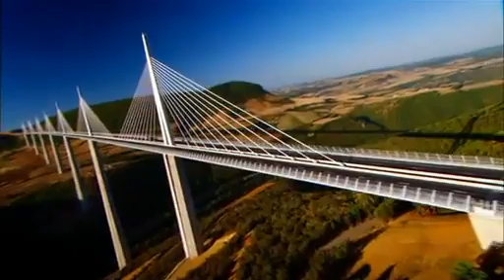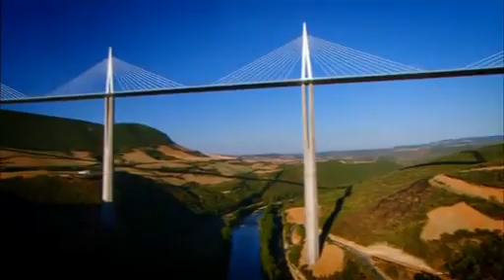Deep in the south of France, the stunning Millau Bridge is a record breaker. These tapering concrete giants are the tallest piers ever built. From the top, you would look down on the Eiffel Tower. Driving above the clouds, you cross the longest cable-stayed bridge deck on Earth, spanning the deepest canyon in Europe. Each year, this spectacular engineering achievement faces extremes of wind and heat in a valley no one thought could ever be conquered. But it wouldn't be standing here today without the power of lightning.

750,000 volts. What? A frying pan. Heat. A lost nuclear submarine. An accident in a silver mine. And a crafty trick of ancient Celtic boat builders. How did all those make that possible?

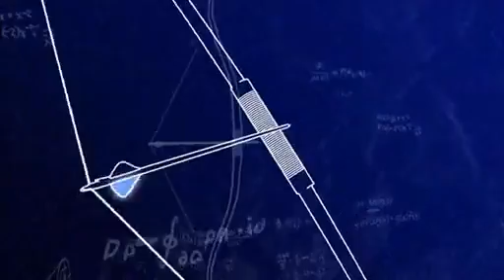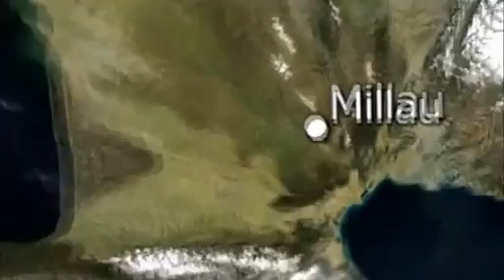This triumph of engineering and design lies in the Massif Central Mountains of southern France. It was built to lift a curse on the tiny town of Millau. For 30 years, the autoroute linking Paris to the beaches of the Mediterranean sped south through the French countryside, until it hit this, the Tarn Valley. A 2.5-kilometre wide, 250-metre deep gorge, or in technical terms, a very big gap.

To cross this gap, the tourist traffic was diverted off the 4-lane express route and funneled over Millau's tiny 2-lane medieval bridge. Summer in Millau was a nightmare. Gridlock traffic with 3-hour tailbacks and 18-mile queues. After 3 decades of mayhem, it was time to conquer the gorge.

And so in 2004, the world's tallest road bridge was born. A giant span, a quarter kilometre high.

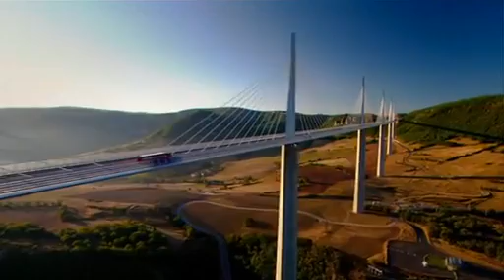The final lightweight steel design was the engineering equivalent of a curved ball, because the road is not straight. It arcs as it spans across the valley. The bend, designed to keep drivers alert, meant that for the engineers, it was not going to be simple to build. They needed a complex skeleton of over 2,000 individual parts. Cutting that much steel quickly and accurately would mean they'd have to master one of nature's greatest forces.

But first, to get the inside angle on the jigsaw of steel that makes up the deck, security have granted me special access. This, in case you hadn't guessed, is the tunnel inside the deck. So right now we're sandwiched between the road up above and then, well, nothing below. And from inside you can see just how clever it is.

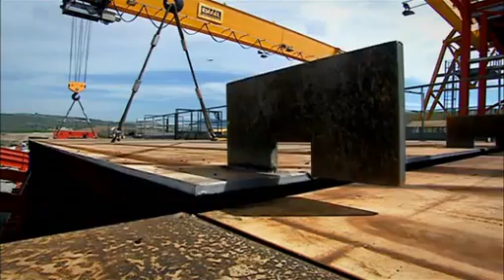It's hollow. They worked very hard to make it strong and light, and to do that they needed thousands of pieces of steel that had to fit together precisely in a massive jigsaw to make the curve of the deck. And each of those pieces of steel had to be made individually and in record time. And there's the challenge: how to cut 2,078 giant pieces of shaped steel with incredible precision, phenomenally fast.

The traditional way to cut steel is with one of these, an oxyacetylene torch. It works, but it's not fast and it's not easy.

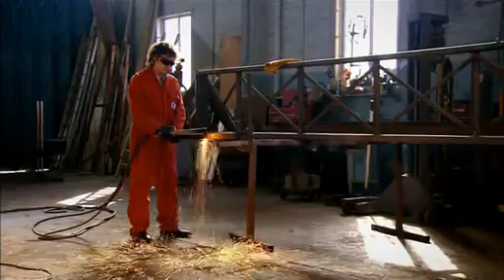Painstakingly slicing over 2,000 steel panels with oxyacetylene was a potential nightmare for the engineers, especially with a €25,000 penalty for every day's delay if they went seriously over schedule. So for the solution to their cutting challenge, they harnessed the power of lightning.

A bolt of lightning is an electric current that can generate up to 300,000 amps. That's enough to power 24,000 domestic kettles. More importantly, when a lightning bolt arcs through the atmosphere, it literally changes the world. It produces a new state of matter, and it's the key to cutting steel quickly. I'm about to see how.

First, I'm going to control lightning. This machine belongs to a special effects expert. He's going to help me become a human lightning rod and direct a scary amount of power. Mark Turner is my lightning wizard.

Wow, Mark, this is like walking onto the set of a 1950s B movie. Do you like it? It's brilliant, I think. What is it? It's a lightning machine. It's what we call a Tesla coil. Okay, it produces lightning. What I'd like you to do is put this on. Oh, I get dressed up? You do get dressed up. This is the fun bit. That looks like chainmail. It is chainmail. It's what we call a Faraday suit. It will protect you from the lightning. Okay, there's holes in it. What, boots off? Boots off, please. Check it off. Are you entirely sure about what we're doing here? What can possibly go wrong? Scarf off. It's my best scarf. Look after that, James. So, 1 foot in there. Nice, it's just the right size, isn't it? So the machine outputs about 750,000 volts.

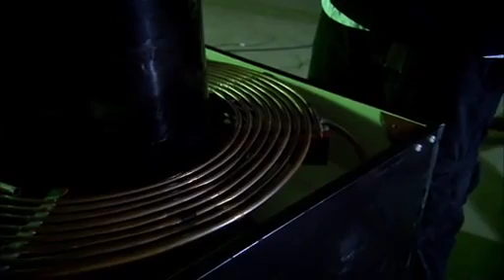Oh look, now I'm connected to the metal. The Tesla coil massively increases the mains voltage. When the energy level's high enough, current will flow to me, and I should be able to direct it with my finger. What about screaming and going like that very quickly?

So everybody with sensitive hearing ought to leave the room now. Anybody with implants in their ears or pacemakers or heart problems ought to leave now. And we're good to go. So, good to go, Richard? I feel lonely. Fantastic.

Mark takes a moment to build the voltage to lightning levels. You feel okay?

This machine was conceived by eccentric 19th century inventor Nikola Tesla. Labelled a mad scientist, well, he fell in love with a pigeon. He was also a pioneer of robotics, radio and electric power. In the course of looking for ways to transmit electricity across America, he devised this way of controlling lightning.

Like nature's lightning, my lightning wants to find the shortest way to Earth. It is the most extraordinary experience, like millions of ants crawling all over me.

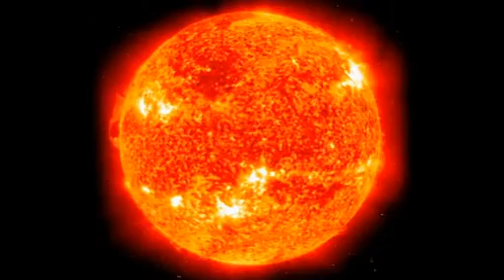Plasma is actually common throughout the universe. The sun and the stars are pure plasma. But it's very rare on Earth. This is a slow-motion shot of man-made plasma.

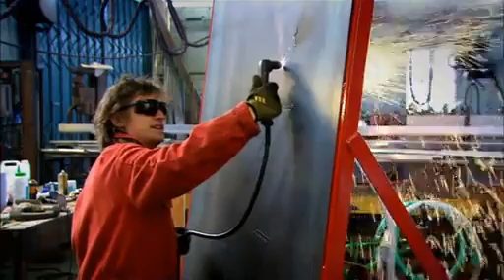When it's controlled and super focused, its heat can be used to cut metal. This is a plasma cutter. A stream of pressurized air comes out at the tip. That air is charged - that's what creates the plasma, and that's what melts through the steel.

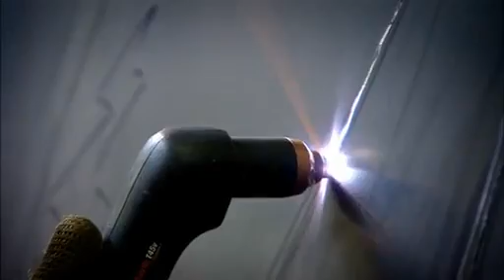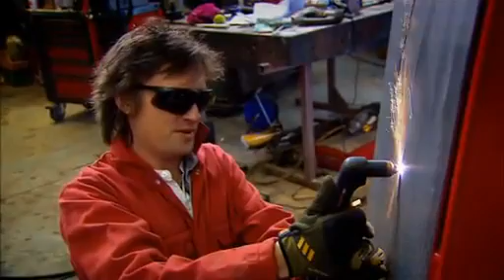Just as lightning charges air and turns it into plasma, the electric current in the cutter does the same. It charges the air, turns it into a jet of plasma, and that's what melts the metal very quickly. This is staggering, the speed. It's actually 3 times faster than an oxyacetylene cutter. But there's absolutely no sense of resistance - no effort to it from me. I'm just moving along the surface of the metal.

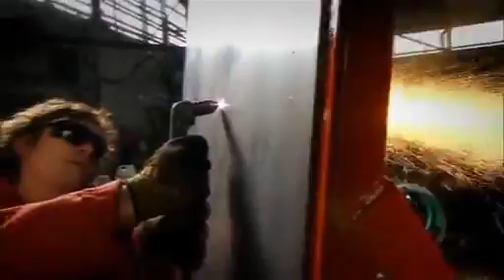Plasma cutting is brilliant for big metal construction because it's quicker than oxyacetylene. It also creates a much cleaner cut, so it needs less finishing, and that speeds production yet further.

Just air and electricity doing that. The power of lightning.

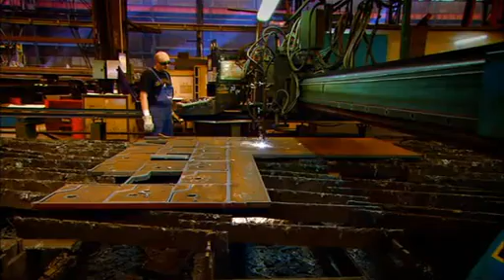Plasma cutting on a grand scale was the secret behind making the Millau Bridge road deck. Here at the Eiffel Metal Construction Company - yes, the same Eiffel that built the Paris Tower - the lightning heat of the plasma cutters sliced over 2,000 steel segments in just 2 years. So that's how the deck of the world's longest cable-stayed bridge was built, by controlling the power of lightning.

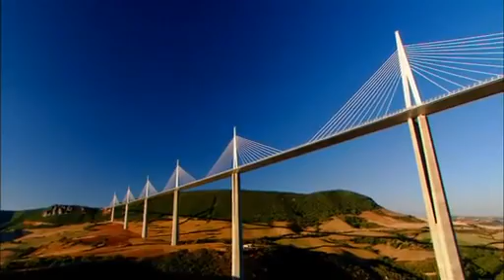But once they'd created the road deck, they faced another challenge: putting it in place without toppling the colossal towers built to hold it up. A lucky accident that reinvented the frying pan would solve this problem.

The Millau Bridge engineers had to somehow launch their steel road across the top of the giant concrete piers. But to achieve this, they had to devise a radical new delivery technique.

On your regular bridge, there are two main ways of getting the deck onto the piers. First you build your piers, which I'm doing here with bread. There we go, that's my piers. Then you can either build sections of your deck on site and crane them into position - there's my bridge complete. Or option two, you build the whole deck and push it out over the piers from the sides of the valley until it's in place. Perfect. But Millau is not your regular bridge.

Because of the depth of the valley they're trying to cross, the piers are not little squat ones like these - they're great big tall ones, 240 meters tall. Which means the expense, difficulty and complications of using cranes to lift the sections of road bridge up were immense. So you go for the second option - you build the deck, you push it out. But with piers this high, 240 meters, the sideways force of the deck would just topple them, and disaster.

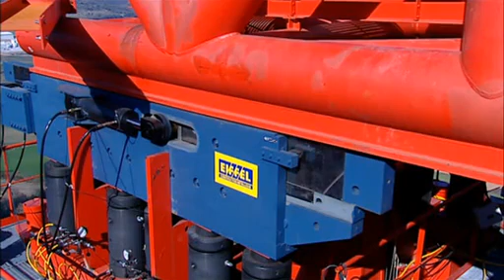This is the engineer's solution: a special hydraulic jack. It uses two giant wedges which slide across each other to lift and move the steel deck over the piers. Using wedges means the road deck is lifted and slid forward in one move, avoiding any pushing against the piers. Then, as the second wedge is pulled out, the deck is lowered to sit back down on top of the piers. Both wedges then reset to start the cycle again.

Each cycle lifts and moves thousands of tons of steel, a modest 60 centimeters. But over 15 months, the giant road deck was slid precisely and safely into place. It's incredibly simple, but very, very clever.

There's just one thing: 36,000 tons of decking are pressing down on top of these wedges. They have to be able to slide over one another to work. Well, to do that, the engineers had to rely on the most slippery substance ever created.

Back in 1938, chemist Roy Plunkett was working to improve the efficiency of fridges, but he ended up making an amazingly slippery powder. He'd made PTFE, polytetrafluoroethylene, known the world over by its famous brand name, Teflon.

New black, no-stain Teflon. Even hours after cooking, pans rinse clean in seconds. No soaking, no scouring. Teflon inside.

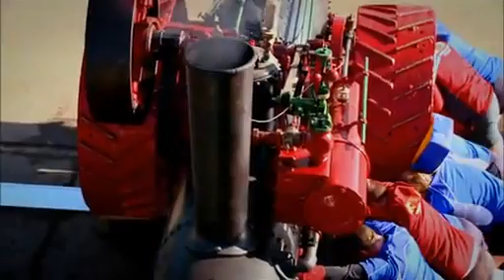Heave! It's going! There you go. Go on, hey! Keep going, keep going, keep going, keep going! It's going, it's going! Drive the legs, drive the legs. Oh, there we go, boy. There we go, there you go. Oh, well done, we did it. Lads, fantastic, you can take a breather.

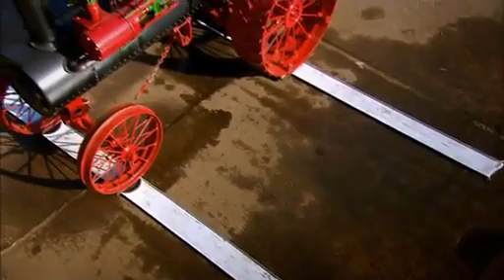Obviously, it was only really when Gary and I joined in that you'll have noticed it moved. So there we have it - over 9 tons of traction engine shifted. Standing on concrete, it should have taken 300 people. On Teflon, it took just 10. A pretty graphic illustration of just how effective PTFE is.

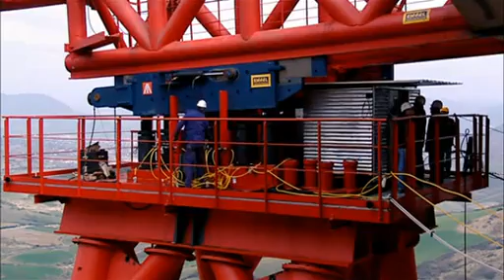Obviously not just at moving traction engines sideways with a rugby team - you can also use it to move bridges, and they did. Once the launch had begun, there was no going back. PTFE proved itself on the wedges, sliding the massive steel road deck over the valley - all thanks to the wonder non-stick stuff called Teflon, discovered by luck in a lab.

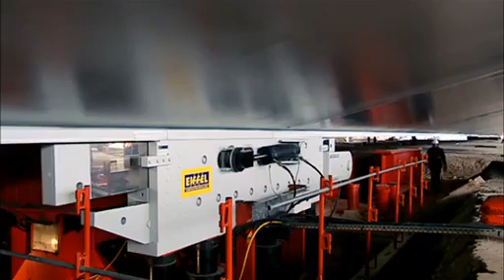Now the engineers had to face their next big problem: how to construct the tallest piers ever built, each to a specific point in the sky, with millimetre precision.

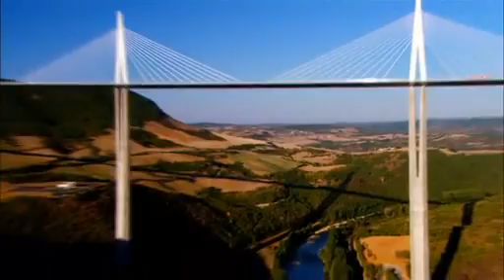The highest of these giants is 245 metres, as tall as a 70-storey skyscraper, and the other six aren't exactly short. They all had to end up in exactly the right place, within millimetres. They were only possible with technology from the submarine war games of the Cold War.

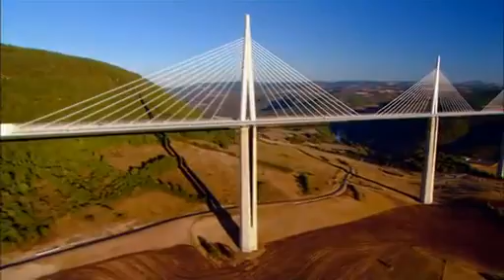Engineers analysed the stresses and strains on the bridge round the clock, 365 days a year.

This is the control room, where today cameras and sensors monitor the traffic, the wind, temperature and humidity. But back then, when the bridge was under construction, it was, if anything, under even closer scrutiny.

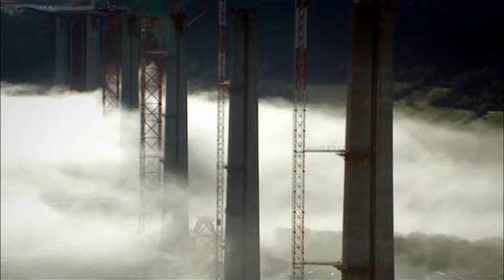Reflectors dotted about over the structure allowed the engineers to track the build and monitor the bridge's precise position. The engineers needed to build each towering pier up to a precise point in space, hundreds of metres above the ground, so it could meet the horizontal deck as it slid out, thousands of metres from the valley sides.

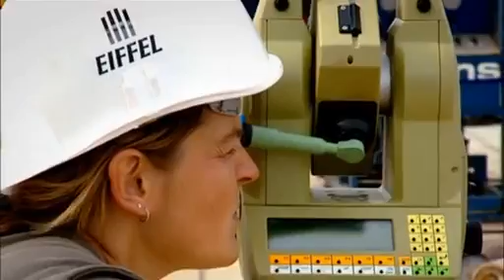A precise surveying network ensured that they got to exactly the right point in space, to within millimetres - impossible without a supremely accurate system of measurement. The kind you'd need to find a dot in the ocean. Cue our next connection.

It all started when US nuclear submarines began to get lost. The subs were designed to submerge for months, with gyroscopic systems to record every move. But over time, tiny errors mounted up. When the subs surfaced out in the middle of the ocean, they couldn't work out where they were. A precision nuclear weapon is not much use if you don't know which way to point it.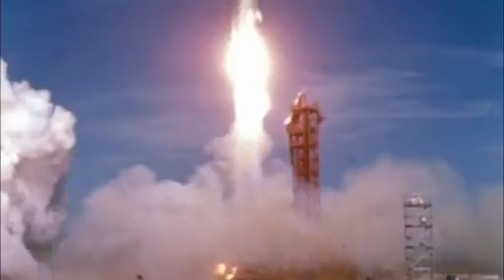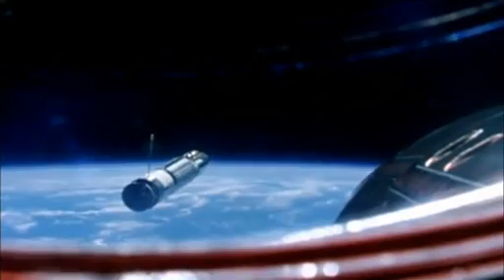The US Navy's solution was to launch satellites. On surfacing, the subs would listen for the satellite signal to work out where they were. It was the very first use of satellites for global navigation - the foundation of today's global positioning system, or GPS, as we all know it.

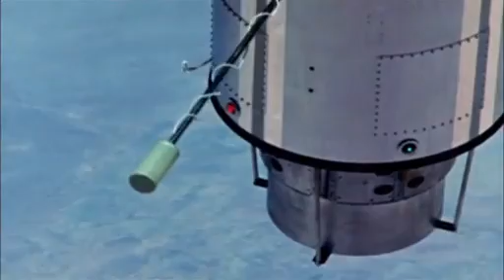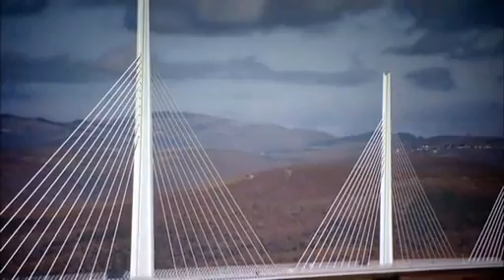But how does it actually work? And how could a signal beamed from 20,000 kilometres away help engineers build a bridge to millimetre accuracy? The trick is to calculate how long a signal takes to get to Earth. If you know its speed and when a signal was sent, you can work out distance very accurately.

To see just how this works, I'm meeting John Shelton, an expert in the field of acoustics. In a field. Hi, John. Hi, Richard. Well, I'm here, and frankly, I'm confused.

So, first of all, how can you measure these distances? What are we going to do? Well, you know how GPS works. You've got satellites up in the sky beaming signals down to us. Depending on where we are on the surface of the Earth, by measuring the delay between those signals from the different satellites, we can find out exactly where we are, because we know where the satellites are and we can measure the delay. Yes, I can get that. That's right. The only problem is we haven't got any pet satellites.

So instead of using radio signals, we're going to be using acoustic waves. Noise. Exactly. How? So what we need is a nice noise source. I've got my car, I can start it up, it makes quite a racket. Big V8. No, I think we can do better than that.

All right, it's this. I did wonder. It's in here, it's in here. Let's see, can I help? That's louder than my car. It's quite handy, isn't it? Good enough? Yeah, we've got the gizmo over here, and we're going to take this with us, and we're going to be making the noise as we go down and measuring the delay as we go. You coming with us, Chris?

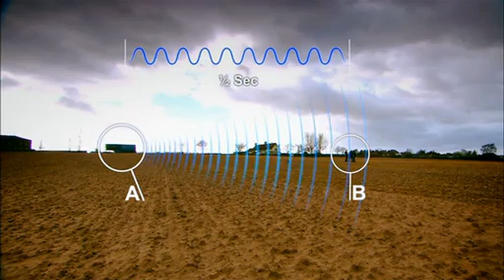John's computer measures the time it takes the guitar notes to get from the truck at A to us at B. From this, knowing the speed of sound, we can work out how far we are from the start. So a half-second delay would mean that we're 170 meters from the speaker stack, our own version of a GPS satellite.

This is quite weird. Will that do you? 170. There you go, thank you very much.

So although what we've been doing was a bit, frankly, odd if you were watching from over there, we were using a signal to measure distance. And it doesn't matter what the signal is, we use noise, it could be anything. If you know how fast the signal is travelling, and you know how long it's taken to get from one point to another, then you can use that information to work out how far apart those two points are. You don't need a guitarist.

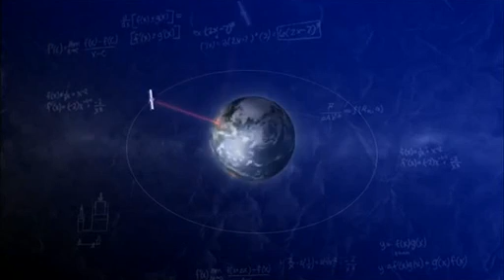The satellite signal the nuclear subs listen for contained data on the time it was sent and where it was sent from. The more satellites you have, the more precisely you can fix your position. Measuring the delay from the time a signal was sent to the time it's received, you can work out how far you are from a satellite, just like we calculated our distance from the guitar amplifiers. Today, there are 24 global positioning satellites orbiting the planet, sending signals back to Earth.

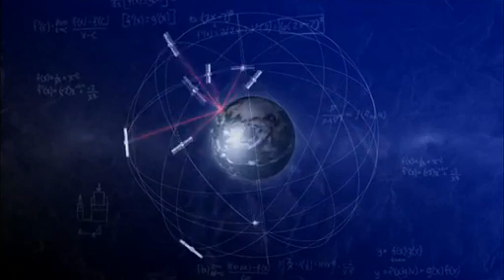Now, GPS receivers use exactly the same principle, only with greater accuracy. They compare the distance from four or more satellites to determine their position. Your GPS receiver can work out where it is to within 10 meters. That's fine for directing your car, but completely useless in building a bridge where an error of 10 centimeters would be a disaster. The Millau engineers fixed GPS receivers to the deck and piers to keep construction on track. Their system was way more accurate than car sat-nav, but it still wasn't enough.

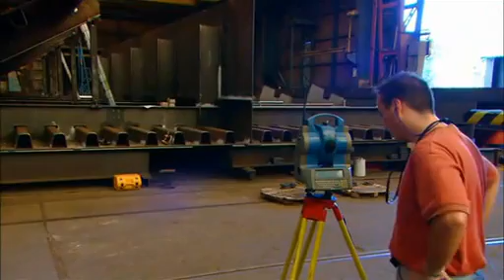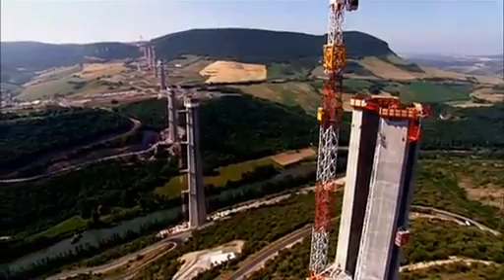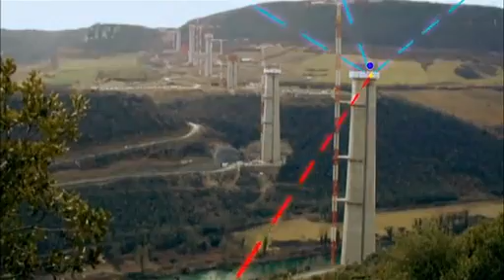Tiny temperature fluctuations and building stresses could send the piers and deck off course, and although successfully guided by the satellite data, they needed to double-check their GPS positions against a rock-solid reference point, so they anchored one to the ground. The engineers took GPS guidance a step further. They bolted a receiver to a fixed point on the side of the valley, and it provided a reference signal for all the other receivers on the piers. Because it's anchored, it reduced the error of the GPS signal down from meters to millimeters. The network of monitors on the bridge constantly checked the accuracy of their position data against these known points. And all the time, the towers climbed skywards.

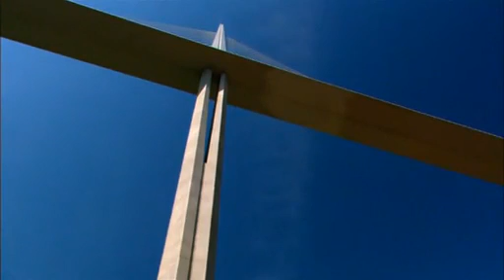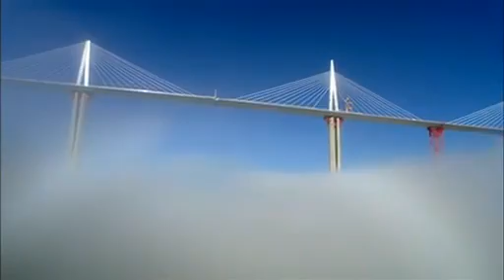So that's how technology for locating lost subs positioned with pinpoint precision the world's tallest piers. But Millau's steel roadway, weighing five times more than the metal used to build the Eiffel Tower, needed support from above as well as below.

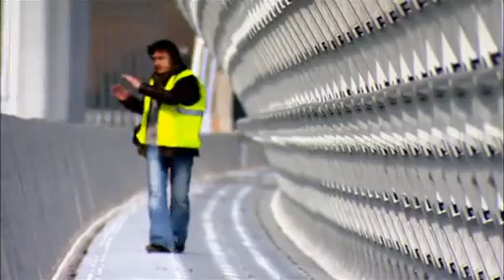And that's where cables come in. When the deck was being pushed out over the top of the piers, the engineers used a web of cables to support the end of it, and they held it in place even when the winds blasted up the valley.

So how did 36,000 tons of steel road stay put in a valley notorious for storm-force winds? The answer lies with a series of accidents in a German silver mine.

In winter and early spring, Europe's weather can turn on its head. Low pressure over the Mediterranean sucks cold air from the north down through the south of France. The Tarn Valley is pretty much your perfect wind tunnel, channeling mountain storms along its length. Winds here can reach 130 kilometers an hour.

That's a pretty severe test for the cables here on the Millau Bridge. They take the strain, but it's only because of a series of mining accidents that they exist at all.

Throughout history, miners have hauled heavier and heavier loads up from below ground. But this put dangerous stresses on the traditional pulleys and ropes used.

Man has made rope since the earliest times, and depending upon where you lived, you could choose from a range of different plants to make it. In Asia, a relative of the banana plant was used to make manila. And across much of Europe, cannabis, of which this is a relative, was used to make hemp, among other things. Rope is usually made by twisting fibres together.

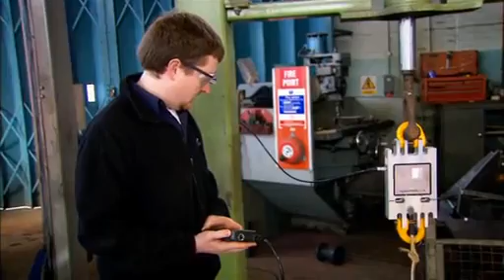And here we go, with the load increasing. We've just hit 100 kilograms, 200. And we're now on 260 kilograms. And now we're just hitting 300 kilograms. And it is stretching. Oh, there you go, look.

And there we go. The rope doesn't break suddenly, but gradually different strands of the rope start to break individually. It's still supporting some load until eventually the final strand will break. And that's your lot. Got to 640 kilograms. That's nearly two thirds of a ton.

So the way it breaks is useful. That's right. The weight at which it breaks is not so good. The rope breaks gradually — single strands break, but the rest of the rope still holds some of the load. So it doesn't just give up. So we need now to test something. Exactly.

To earn more, the miners needed to haul bigger loads, so they were looking for something stronger than rope. Which is why alternatives like metal chains came about. Trouble is, compared to rope, metal chain has a nasty way of breaking.

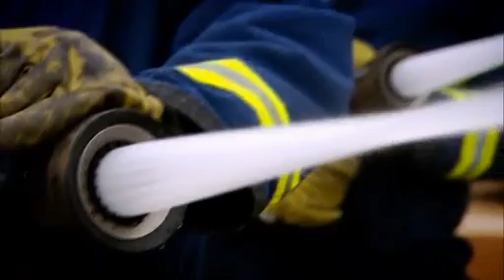So now we're hanging a large car from it. The chain is rated at 2.5 tons, but we've already hit over 3.5 tons, and it's still holding. Now we're running out of water — we've probably got about a minute's supply. What you're telling me is our chain is too strong? Yeah, yeah. OK, thank you.

Oh, there you go. Or maybe not. 3,790.

Just like in the mines, the chain takes a much greater load than rope, but it breaks catastrophically and without any warning. Oh, that's perfect - that's exactly where the two links cross over, yes, shearing, where it's bending round.

So how quickly were you recording this? We're recording at 2,000 frames per second. So that broke in less than 5 milliseconds? Yes. So you'd have no warning at all? Instant. Ah, you have the culprit.

We found the link here in the water, and you can see where it's failed. The significance is where it's gone is a weak point inherent to the chain, inherent to its design - the material here sees a shear stress that causes it to fail. This shear strain, this bending, is a weakness every chain will have at that point.

And that's what cost lives down the mines. Exactly, yes - a failure that catastrophic and that quick. What can you do? And that's where a great invention from a German silver mine comes in.

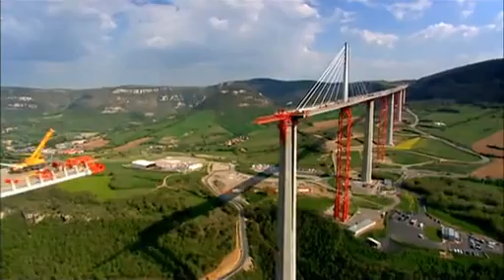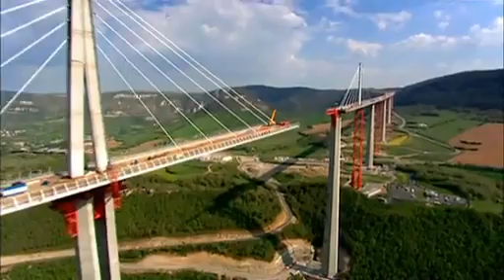Back at Millau, the engineers were utterly confident in the strength of their metal ropes. At one point during construction, almost 170 metres of deck hung over the valley from just 6 cables. The completed bridge is designed to carry 35,000 tons - equivalent to pickup trucks crammed nose to tail in all lanes, piled 10 high.

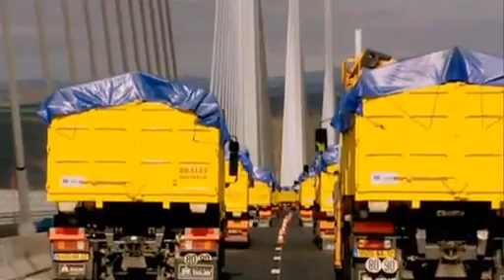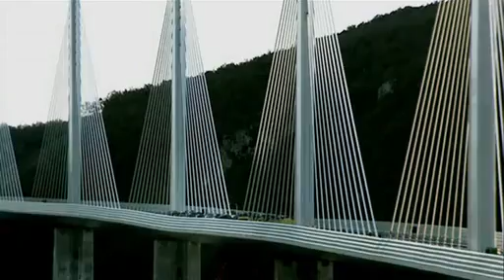To prove the cable's strength, engineers organised a showy demonstration. 28 trucks with a combined weight of over 900 tons drove to the midpoint. The cables barely gave - the span bent a mere 26 centimetres. A triumph then for Wilhelm Albert's metal rope idea.

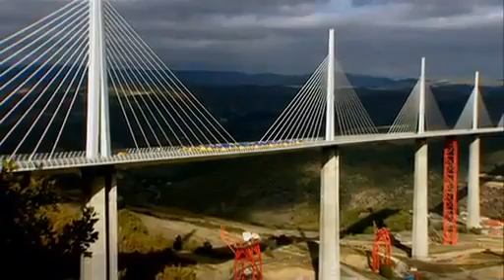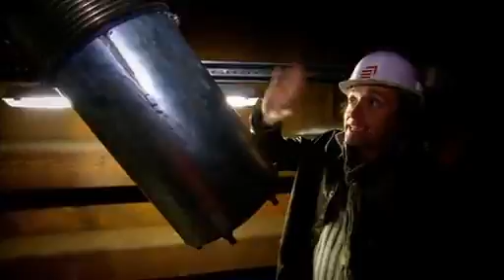But there's a neat twist here at Millau. This bridge is designed to last 120 years, but inevitably a century-old cable isn't as strong as a new one. If the bridge is held up by cables, how do you take them down to replace them without the bridge falling down? The answer lies in the construction of the cables themselves - from above they look like a single solid piece, but each one is a bundle of as many as 91 smaller cables. Those smaller cables are each made up of 7 individual strands, and their job is crucial, because each one can be taken down and replaced if it corrodes without having to take down the entire bundle.

Prompted by accidents in German silver mines over 180 years ago, the inspired idea to make rope from metal strands has made the magnificent Millau Bridge possible. But the bridge would still collapse in the scorching summer heat without an engineering solution borrowed from the ancient Celtic boat builders.

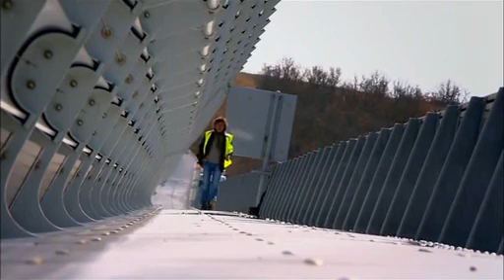Building with metal comes with one massive drawback: the hotter it gets, the more it expands. Let me show you a little example of metal expansion. This is a heavy-duty jar, pretty tough to break, and this is a metal core. Putting the jar around the core, I shall now apply heat - you probably guess what's going to happen if I heat up the metal core and expand the metal.

Add heat to metal and it expands. This becomes a problem when the metal is up against a material that's much less flexible, in this case glass. While we're waiting for something to happen, it's worth thinking where else we might find large amounts of metal interacting with a material that doesn't like to bend.

The tiny expansion in this demonstration scales up the more metal involved. Rail track can dramatically expand in extreme heat, and with nowhere to go, it inconveniently buckles. If this were to happen on a bridge, it could be a disaster.

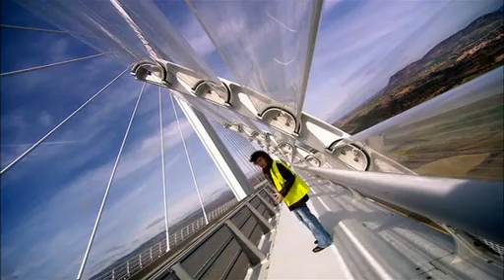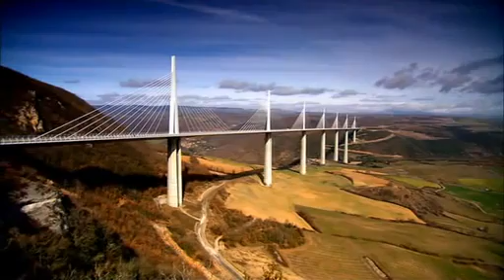On your average bridge, you leave gaps, expansion joints, to take up movement of the deck with changes in temperature. But this is not your average bridge. The Millau Bridge has been welded into one continuous piece of steel from end to end. The only place for expansion gaps is where the road meets the valley at either side. In the heat of summer, these expansion joints have a critical job to do.

Every summer, the bridge is heated up and it expands. The engineers predict that at 40 degrees, it grows by about 1.2 metres, and that's what this section is for, to allow it to do that. The expansion joints above my head, that you can hear the traffic thundering over, allow the road to remain a continuous surface. As the bridge moves backwards and forwards on these mounting points, even the cables taking power to it are designed to be flexible with that movement.

And that's all well and good here, where the bridge meets the land. But it doesn't expand just at its ends, it expands all along its length. So what do you do at the points where it's fixed to those concrete piers?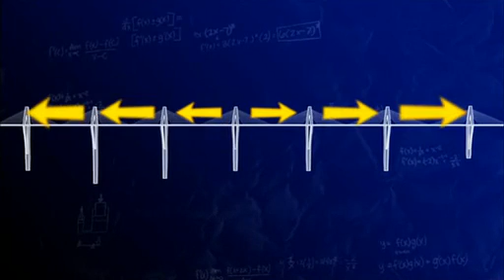Obviously, the deck has to be fixed to the piers for stability. But in summer heat, the 2.5 kilometres of horizontal deck expand. It's the growth along its length that's the real problem, because it exerts a massive, unstoppable force on the vertical concrete piers, and concrete is notoriously unbendy. So the engineers came up with a very clever solution.

The base of each pier is solid, but the top 90 metres is split into two thin arms. How does this weird design overcome a potentially fatal threat?

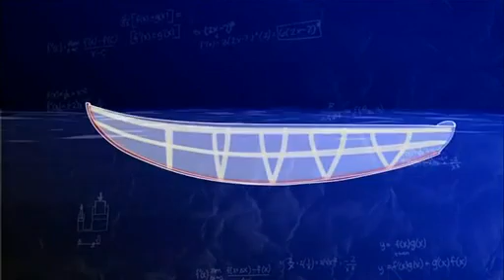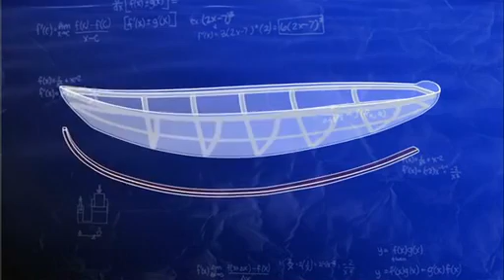That brings us to our final connection: prehistoric Celtic boats. For centuries, the ancient Celtic peoples of Ireland and Wales used ingenious boats called curraghs. They were made of a bent wood frame and covered with hide, or sometimes canvas. The key to making concrete flexible enough to withstand summer heat lies in the wooden skeleton of some of these boats. In some curraghs, pieces of wood, including a keel stringer, would run under the boat from stem to stern. They had to be strong, but also had to curve. Even flexible timber can only bend so far, but some early woodworkers found a way around this.

To find out how, I'm visiting the carpentry shop of Peter Faulkner, whose passion is building these craft. Richard: So, you run a workshop here building traditional boats using ancient skills, but there is a link to do with the way the pillars of our bridge are built.

Peter: It is to do with that split in them, and I think before we can really understand it a bit more, we need to split some wood. Richard: How do you do it? To cleave it, yes? Peter: Cleave, that's the word. You want to cleave some now? Richard: Yes, I'd like to cleave some wood. Peter: Great, a couple of pieces here. That's a piece of ash. So we just... I'm going to put in a wedge. Cleave away. Do you want to have a tap? Have a tap, you'll soon work out.

Richard: These are not modern tools, are they? Peter: No. Richard: But then I guess this tells us that actually people have known about cleaving wood for a long time. This isn't new technology, is it? Peter: No, prehistoric. I mean, we don't know, 10, 20,000 years.

Cleaving the wood like this means it splits along its natural grain and keeps its strength, but it also changes the flexibility of the wood dramatically. Let's imagine this now was one of the pillars supporting our bridge. The problem here, remember, is flexibility, because the road deck is so long. When it gets hot, it expands and it moves out this way, or it shrinks back this way when it gets cold, and that needs flexibility.

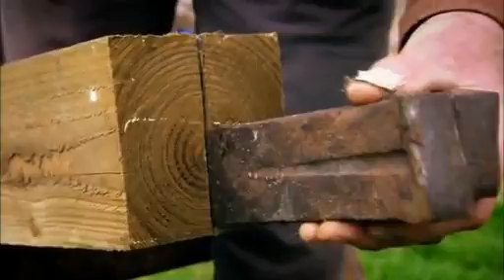Now, with the new post, Peter uses wedges to drive a split in it. Will this cleaved timber really bend further than the last post?

Right, now to simulate another hot day at our bridge. The sun comes up and warms 2.5 kilometres of steel road deck. It expands and pushes our column. That split in the wood is allowing it to flex. It can still support the same weight from above, but it's coping.

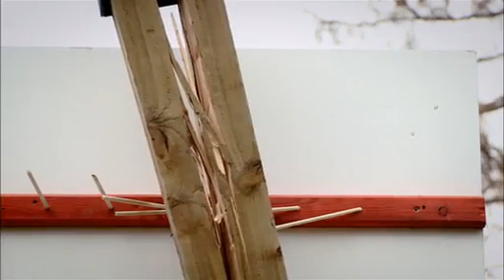Right, that's 4. I'm going to see if I can get it back. So this split timber has gone twice as far without breaking as the first unsplit one. But will it return to its original state? As I release the tension, the wooden test pier shows it handles the stress without any permanent damage. All of that flexibility given to it just by this split in it, down to there at the top, lets it bend. It can still support, but now it can bend.

Modern woodworkers believe Celtic boat builders used this same principle for their curraghs. The wooden keel stringer could be split to allow it to bend, whilst keeping it strong and sturdy.

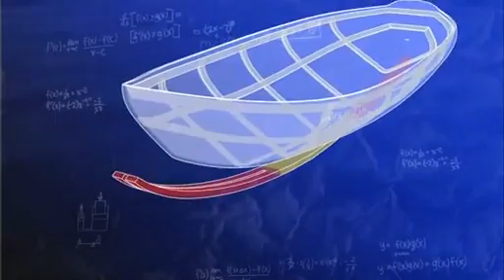On the Millau Bridge, concrete, which is usually more like brittle glass, can become more flexible with a split in the right place.

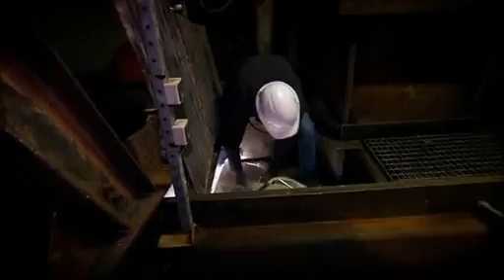I decided to go to the top of one of the concrete piers to find out just how they cope with the deck movement in summer. I wish I hadn't.

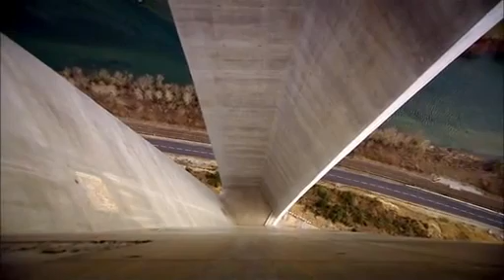The ladder is strong. Four. Climbing the ladder down onto the tiny inspection platform precariously positioned on the tallest bridge pier on Earth was more than scary, a lot more. OK, I'm assuming there's somewhere down there to attach the harness to. Oh, that's a view. My, that's a view. Oh! Mother of God. That's fantastic. If I faint, is that an excuse?

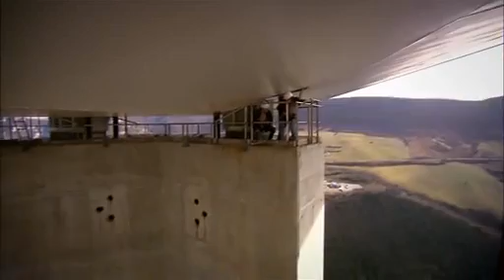Oh. Second time, and I brace myself to face the winds and my fear 245 metres above the Tarn Valley. OK, where does this go? Oh, I feel better now.

Bridge engineer Sylvestre Galice explained, as I hung on for dear life, just how the concrete Y shape allows for movement of the pillars. The Y form on the concrete structure makes the movement easier. So the pillar, if you like, is fixed to the deck. It's the deck that's in charge, and the pillar has to move with the deck as it expands and contracts.

Great engineering, making concrete bendy. But discussing the concept nearly a quarter of a kilometre in the air wasn't my idea of fun. Thank you very much for explaining it to me. I'm not sure I'm so grateful to you for bringing me here to do it. We could have done this on the ground.

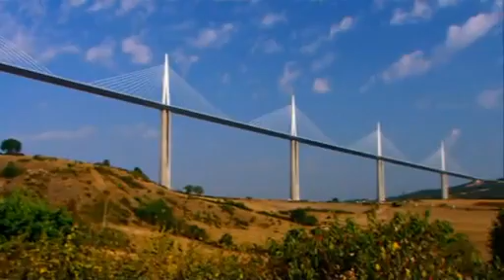In the roasting heat of high summer, when the massive metal road deck expands, these split piers can flex 10 times more than conventional concrete towers. Then, as night falls, the bridge cools, the deck shrinks, and the giant piers return to shape.

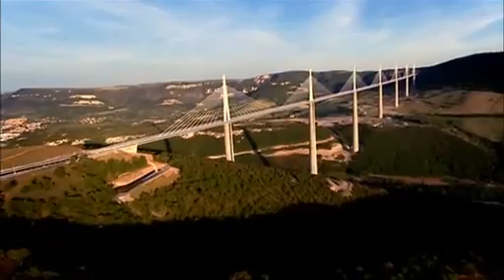Concrete cleaving is just one inspired solution to the many exceptional challenges that the Millau Bridge engineers overcame and rightly celebrated. They wanted to build a bridge that was more than just a link between the two sides of the valley. They wanted to create a structure that, rather than detract from, would add to the landscape — a sculpture in a region treasured by France for its natural beauty. And for what it's worth, if you ask me, they did it.

Who would guess that to make it they embraced the power of lightning, were guided by submarine navigation, used a chance discovery from a chemistry lab, cables prompted by accidents in a German silver mine, and were inspired by a crafty idea from ancient boat builders. The Millau Bridge — a stunning piece of engineering made with incredible style.